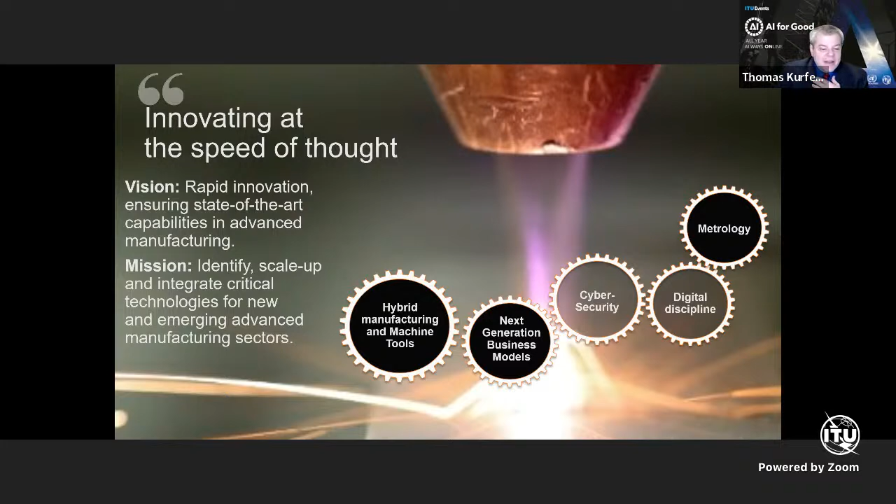From a technical perspective, much of what we think about is building up a product layer by layer—many people think of their MakerBot, a gantry type of system. But the reality is, it doesn't necessarily mean we have to build up in just one direction. Here you can see one of our 5-axis machines, actually a simulation of a 5-axis machine, where we're using a rotary axis to change the orientation of the build.

Think about the propeller, or this paddle we have down here—you don't need any support structures to make it. You can see that as we make it, we just move along and rotate to make sure we're balancing against gravity. Now, as you build this, there are some things you need to think about.

I'll start off with real intelligence as opposed to artificial intelligence. We ran some experiments initially and learned pretty quickly that there were difficulties in printing these corners—it shouldn't be much of a surprise that there's less material on the inside curve than on the outside curve. So when you print this—and this is just a blow-up of the inside area—you have to print fewer passes. You can't go all the way to the inside, so you need to put less material there.

So here are things where we can start to train artificial intelligence to think along these lines. And frankly, part of that training also comes from what we're training our real intelligence, our real engineers, to think about—how do we think about these types of problems, and how do we get artificial intelligence thinking about these problems to help us move things along?

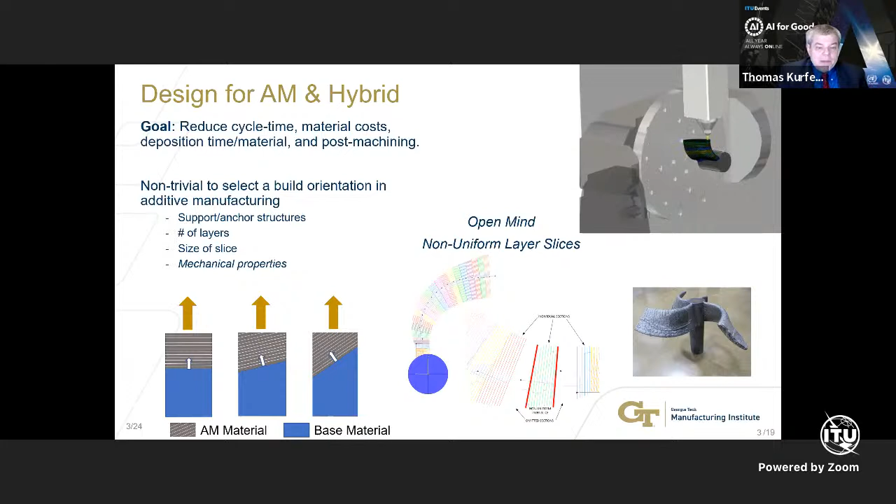One thing you'll hear a lot from me is what I'll call AI, but I call it augmented intelligence—how do we use artificial intelligence to augment the human? I want to make it very clear: I'm not interested in replacing the human. I want to augment the human and move them along. From a societal perspective, this is really the direction we want to go. I'll talk a bit about why it's not just taking the data and sticking it into a black box model and putting it out. So that's one example.

I will show you another example. In this particular case, we're doing what we call 3D turning—actually using the rotary axis and putting the material down. I should tell you, this is not the actual speed; I thought we did have a speed-up here.

This is probably about 10 or 20 times the speed, so this is not the actual speed of the processing. It doesn't quite go this fast, but you can see the liquid material going down, and we're making this bell-shaped object, using both the fourth and the fifth axes.

Again, this is just another way of thinking - not your Cartesian printing, but a cylindrical type of printing. Here we're looking at a conical shape, and if you recognize this, this is a probe from Renishaw. So we're simply using a machine, or a technique that's been out there for decades.

What you see on this probe is that it is cooling. And when my engineers brought this to me, I looked at this and I said, okay, how long does it take until you can touch this part by hand? And they said in about 10 minutes it's cooled down enough that you can touch it by hand. I thought, well, that's great.

If you look at this, an engineer or scientist will see a first order response, which is exactly what you would expect from a block of steel cooling down. So I looked at it and said, first order response with a time constant, or settling time, of about 10 minutes, 600 seconds. I'm pretty happy with this.

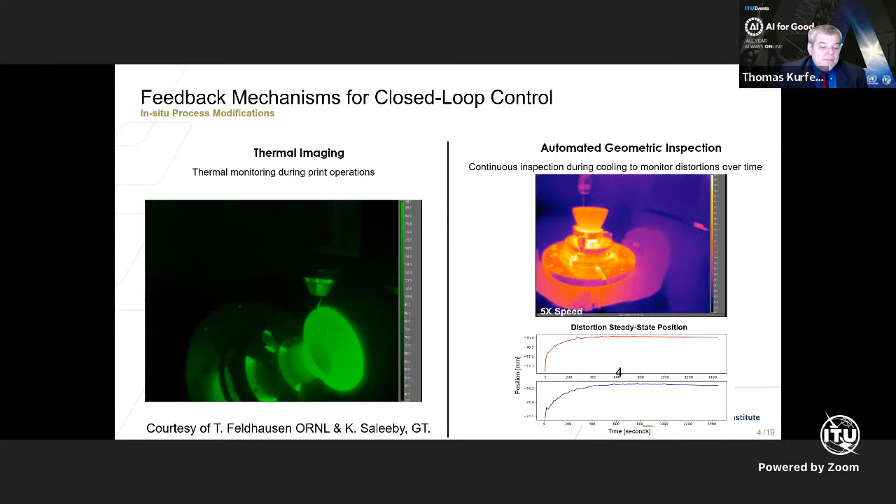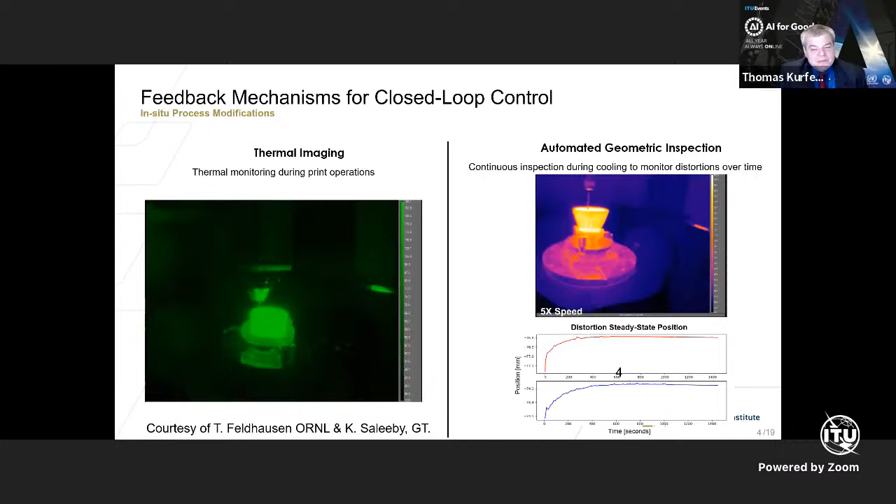Now, if we take a look at this - all right, this is great, but we do have a few other problems, and I'm going to show you where we've got artificial intelligence, and then some real intelligence, which I'm pretty excited about. In this particular case, we're just building up a wall - it's a surrogate model, let's say, of a turbine blade.

Here we're printing as fast as we can, and here we're actually printing. We only print when the temperature of this part drops below a certain level, because if you print too fast, it gets very warm and tends to fall over and not be very good. So here you can see the dwell time actually increases as you're printing this part on the left.

So here we've started printing it, and you can see it slows down as we go. We're using a thermal imaging camera, which is not particularly expensive, tying into the machine. So the idea is we can actually go back and use legacy equipment if we know how to use it. This is some pretty simple AI - just slow down if you're getting too warm.

Now, one of the things you turn around from a cost-effective perspective is you say, well, the problem here is I don't want to slow my machine down. It's an expensive machine - maybe $500,000, maybe $750,000, some of them can be upwards of $1 million. So I really want to go as fast as possible.

But if I go as fast as I can, I don't really produce a good quality part. So one of my engineers, Dr. Saleeby, basically said, well, if this part gets too hot, let's go print this other part. So we're bouncing back and forth between two different parts, not unlike how you might do with 3D printing and packing as many parts as you can in your build space.

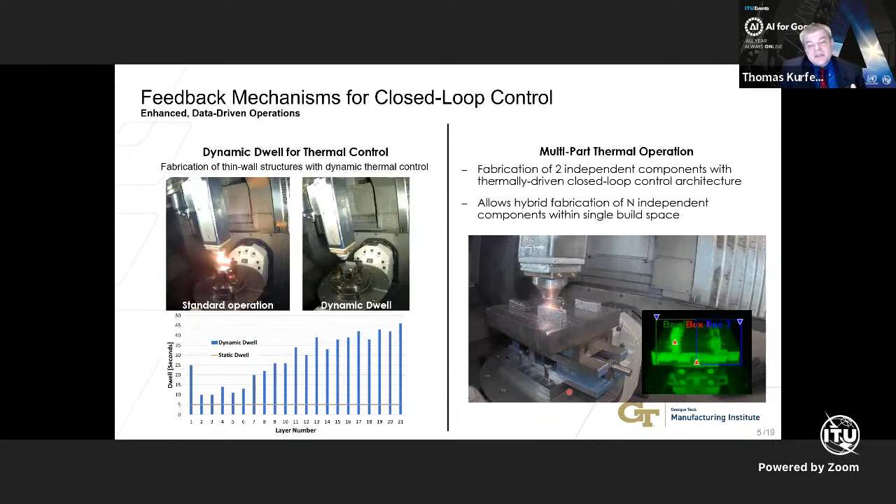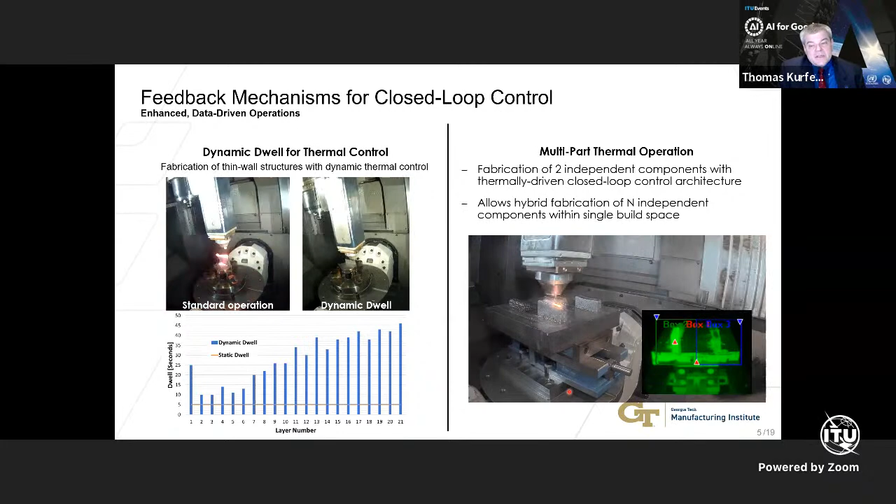But I will also tell you it is a two-way street. We can also take what the artificial intelligence is using and go back to the human operator and augment that operator to make them more cost-effective, more effective, in terms of production operations.

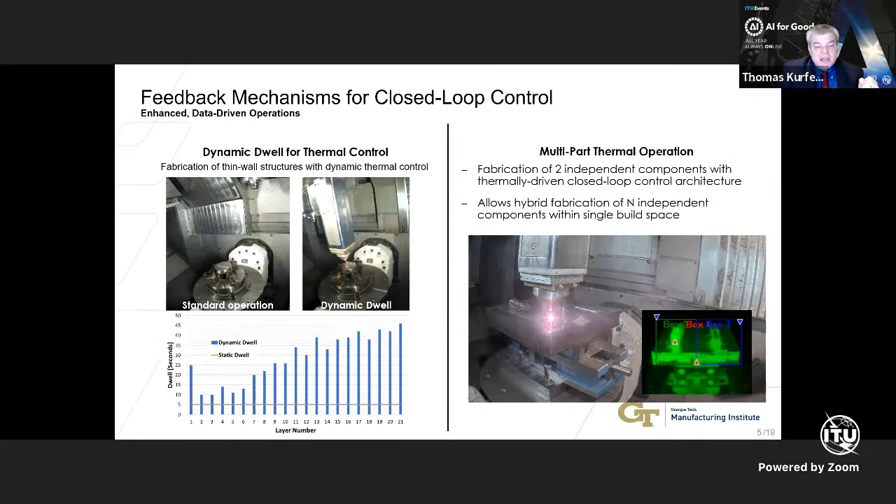So let me talk a little bit about some pretty cool work that's going on at some of our colleagues over at Oak Ridge National Laboratory. This is some work done by Vincent Paquit and a number of his colleagues over there, really going to the level where you can start to control the microstructure of a part.

So what I'm showing here from my colleague, Dr. Paquit, is he's printed out a bunch of different structures in the powder bed system. Basically, you spread some powder out, melt it, let it solidify, then spread more powder out, and keep building this powder bed up. So you build tensile bars at the lower level, and the same tensile bars at the upper level. If you take a look at their microstructure, how the metal forms as it cools, they're very different between the two, even though all the settings are the same.

So you say, why is this? There are a variety of reasons, but it really has to do with it being a different situation when I'm toward the bottom of the bed versus toward the top. You can use AI to tune your machine so that you change your settings ever so slightly, not a very big set of changes, to produce the same microstructure. That's what we're showing here - we've actually produced the same microstructure from the bottom versus the top.

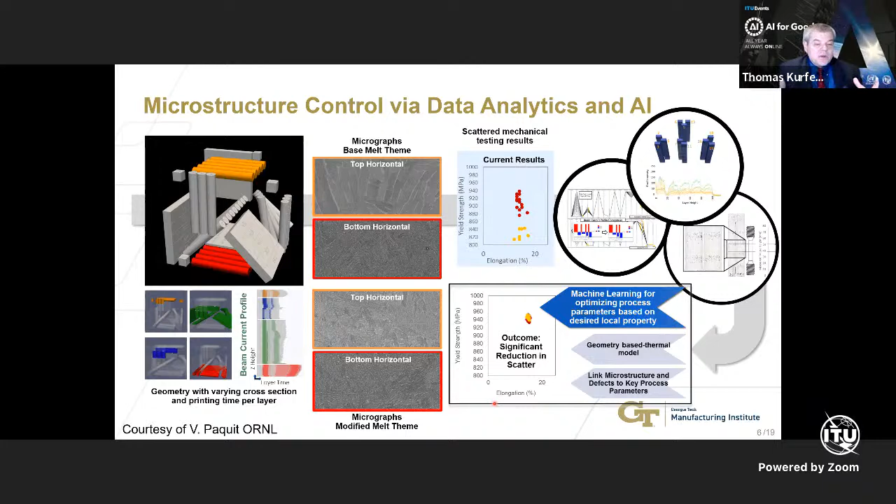I'll just say this up front: a human is good at optimizing maybe 3, 4, or 5 or 6 things if you're really an expert, but AI can help that human optimize perhaps 20 things at a time if they guide each other and work together. So again, augmented intelligence. Just to give you a feel of some of the things we look at and how this works so well.

So now what can happen is the human can work with the AI to see exactly what's going on in the part.

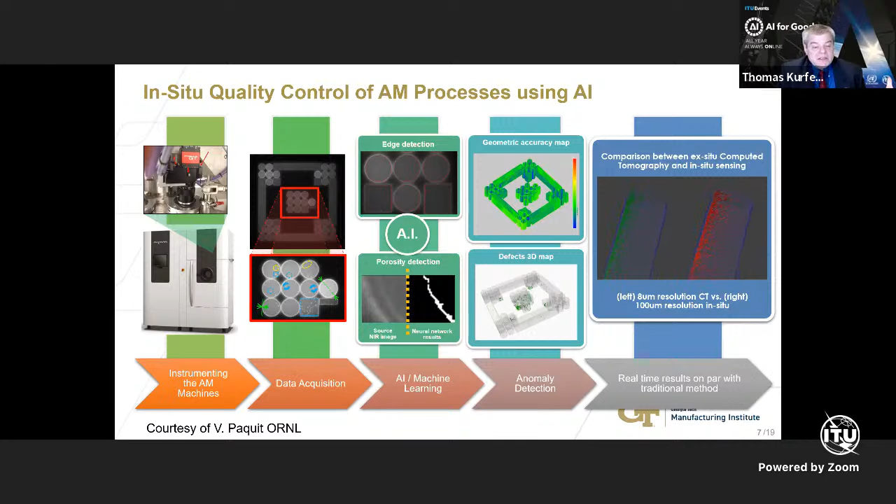Down the road, AI can look at all of these types of images and update the process in real time to move things forward. AI loves images, and so one of the things we might look at is: what about the people operating the machines? There are lots of interesting things you could do there.

I want to point out right away that there are lots of concerns about privacy, so in using this type of information we have to be very careful to enforce privacy regulations and rules. On the other hand, it's also important to make sure somebody doesn't accidentally walk up to the machine and start it inadvertently by hitting the wrong button. So on one hand you want to protect privacy, and on the other hand you want to protect the people around the machine. This can be done, but it's something we really need to think about.

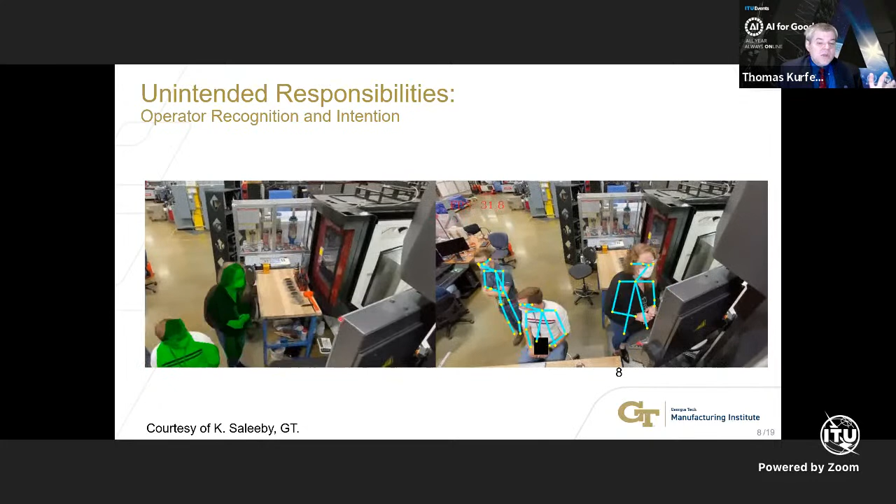We can go even further and actually see where people are looking, and where their hands are. Are they about to hit the start button? Maybe someone is still inside the machine. Are they looking where they should be looking as they're running the machine or hitting the start button?

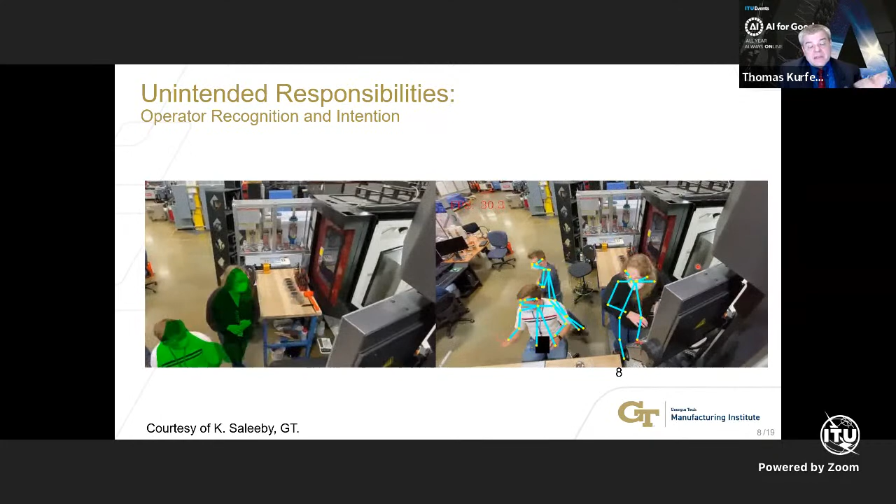Again, privacy is extremely important here. We're just showing that yes, we can do a lot with AI, but we also have to be careful with the data that are generated and how we protect them. In this case it's personal privacy, but in other instances we may look at how to protect proprietary information that gives a manufacturer their competitive advantage.

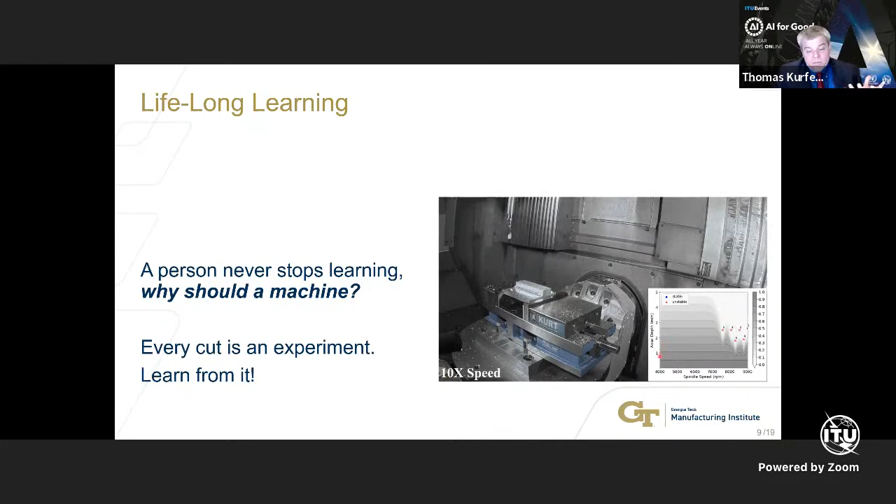The idea is you want to be in the area with the least amount of vibration. You can do this fairly automatically, and while the machine is producing over weeks, months, even years, you can continue listening to it as it may change slightly, and update your model. A key thing here is: a person never stops learning, so why should a machine?

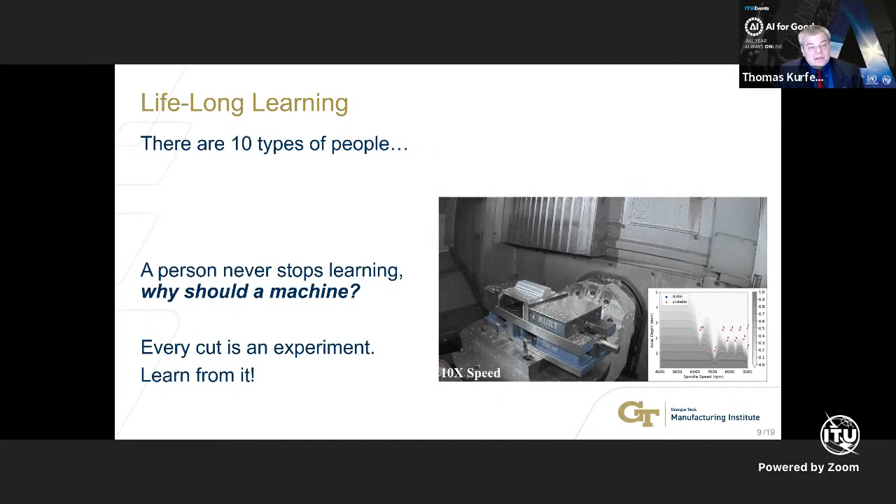I find this sort of interesting: there are really 10 types of people out there. Those 10 types of people are those who understand binary and those who do not understand binary.

If you think about that, of course, all of computer science will laugh at this statement. But the reality is, from a training and educational perspective, we see that computer scientists who have domain expertise, for example in manufacturing, are in much better position for steady and stable jobs than those who are only in pure computer science.

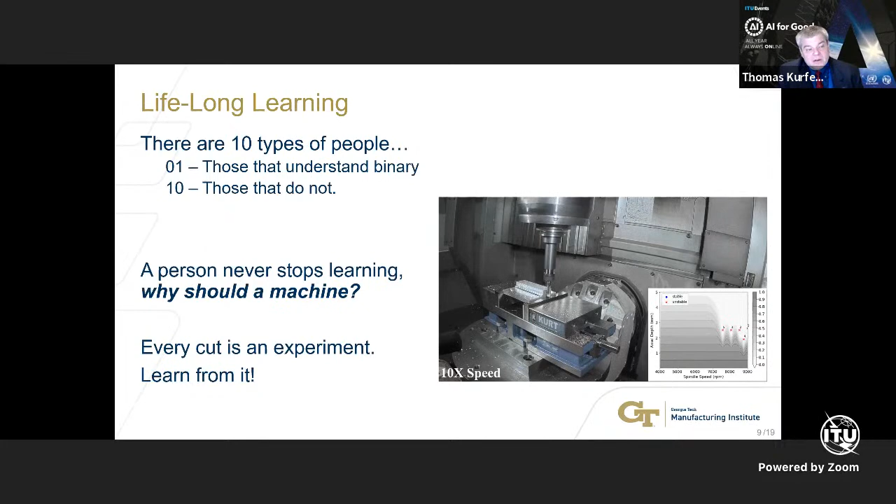So some domain understanding is key. The other side is we also see a lot of engineering types, in particular manufacturing, my experience area, that have much more capability in computer science. And so these tools are available for use, from an educational perspective, making sure people understand how to use AI types of tools.

My colleague Scott Smith over at Oak Ridge, we were PhD students at different institutions, but 35, 40 years ago his statement is: we used to put sensors on all of our machines. We would spend months putting sensors on the machines, run the machine for a week or two, and then spend weeks analyzing the data. Today, all of those sensors are in place on modern machines in production systems.

So every time a cut is made, just like over here, it's like running a PhD experiment from several decades ago. We're continuously learning, and every cut is an experiment. We're learning from it, just like we do in real life.

So in terms of upskilling, it's really rethinking things. You say, well, how do I put additive into a machine tool for hybrid and so forth? It's really thinking outside of the box.

In this particular case, we have a robot that's used to load and unload the machine. Instead of having the loader and unloader on there, we actually have it with a weld head, so it's putting down metal inside of the machine. It turns out we can take some of our older equipment and utilize it in a very new fashion. This is a 1980s CNC machine tool, and we're using it.

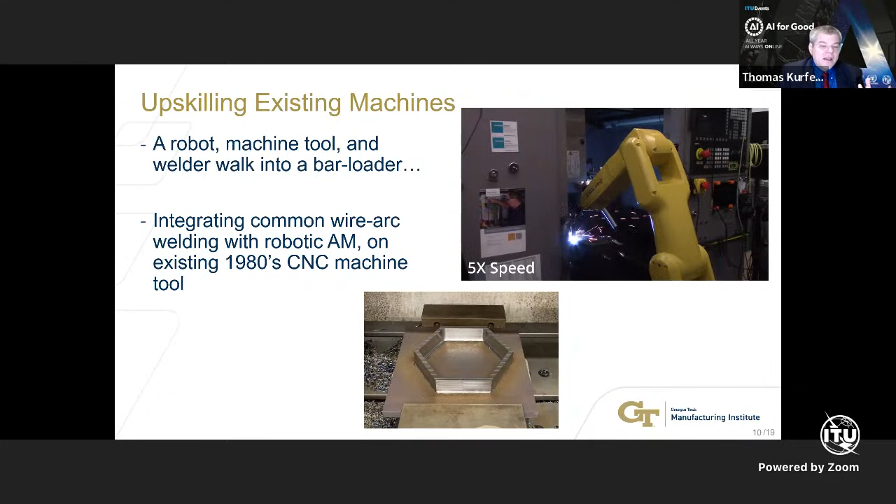So now what I'd like to do is pivot a little bit to AI, and think about how we move forward, and really culturally and mentally how we need to pivot to think about AI and leverage it to improve our current situation globally.

But let me point out something we've probably all seen. I was driving the other day and Google Maps said, get off at this exit. I was thinking, this is not the exit I need; I need to go all the way up to this particular exit. Maybe there was an accident or a traffic problem, so fine, there's real-time sensing that Google Maps has, I will get off. As I got closer, I looked at what Google Maps said: get off at the exit, cross the road, and then get back on.

So it was getting off for a detour of maybe a few hundred meters. I took a look at that and said, well, maybe there's an accident right there at the exit ramp. As I got close to the exit ramp, I looked up and didn't see any traffic. The traffic was flowing straight through, no blockage. So I decided maybe there was a mistake here, and I should go straight ahead. I didn't get off at the exit and kept going straight ahead, and there was no accident.

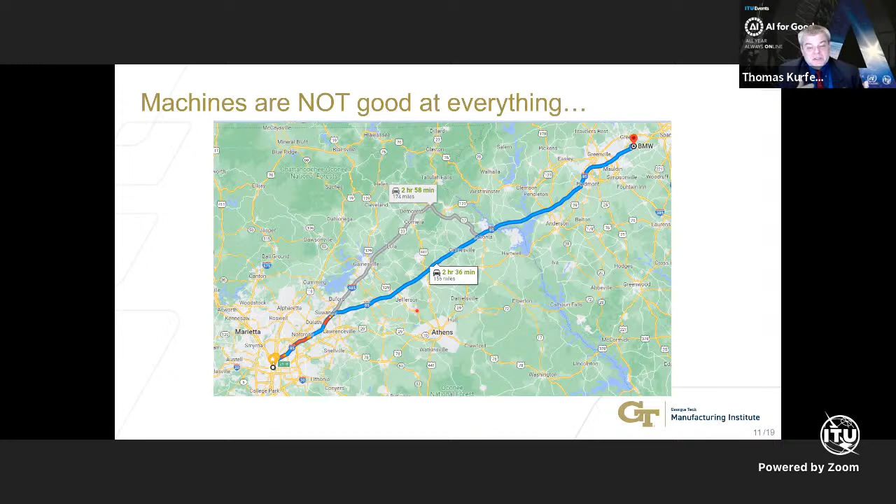So I'm using my own set of sensors, which in this case was just my eyes looking forward and understanding, yes, this is just an error that we sometimes see. I don't know why, but we correct for it. So this is real intelligence working with artificial intelligence to give you the best solution. So these are the types of things really that we look towards and sort of working together.

And so now I will give you an example of how you need to think about some of these problems. So very much in manufacturing, people say, well, I want to use AI to pick out the bad part. Please, let's pick out the bad part and so forth. And the real question is, well, okay, for AI, and I think most people do know this, and if you don't, it's a good point to understand, what is one of the most important things that AI needs? AI needs data. You could say, well, it needs good data, it needs very curated and labeled data and so forth. Yes, but it needs a lot of data.

So the first thing that happens when a company says, hey, can you help us to use AI to pick out a bad part? I ask them, how many bad parts do you make? And their answer is typically, well, 1 part of every 1,000. That's not a very good situation. It might even be 1 part of 10,000, 1 part of 100,000, or perhaps even a part per million. And so if you're making very few bad parts, you don't have a lot of data, so it's very hard to train the network on the bad part.

But what you do make is a good part. And so in this particular case, what you really want to ask is, don't use AI to pick out the bad parts, but tell AI to pick out the good parts. We have a lot of data. We can train it. It can tell you what a good part is. If a part is not good, it doesn't mean that it's bad. It just means that it's not good, perhaps, and that we should take a look at it. So that's where we should focus our real intelligence on. And that's what we're showing over here.

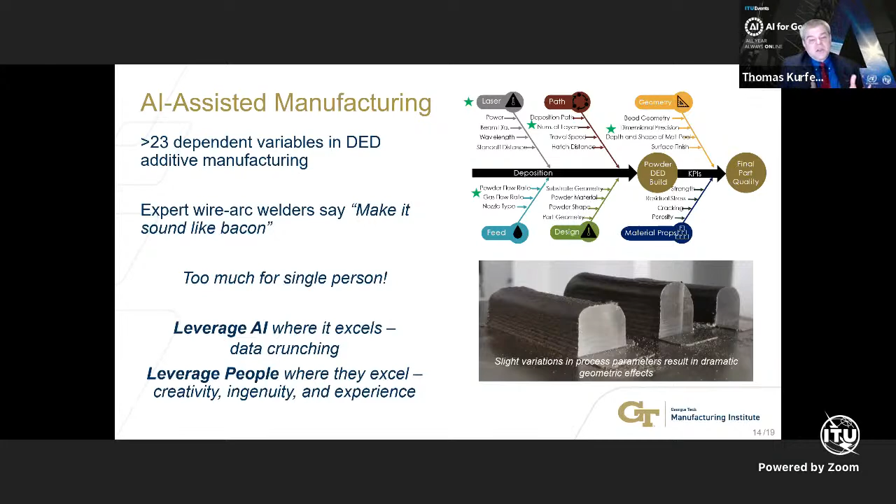So you make a measurement, you say, okay, I've made my measurement, and that measurement is uploaded. So now we have digitized the data. We eliminate somebody punching in a wrong number or recording a wrong number or reading a wrong number. But we have that person maybe make 5 or 6 measurements, and we take a look at their distribution. So the first thing we can do is we can start to take a look at this distribution.

When you're a novice, you have a much wider distribution on your measurements. And then as you go along, you get a tighter distribution. So we can look at the person's learning curve. Again, I want to highlight the fact that we have to protect privacy, but the idea here is not to blame somebody for not doing a good job, but to understand if they're having an issue with it and to help them with their training and also understand the human process.

I don't think it's a big stretch to say, well, gosh, yes, I can have my AI determine the difference between a line and a circle. So, for example, if I have cleaned up this part and we've really gone through it, instead of a bunch of lines, we have circles. If there's a little bit of lines left over here, that means we haven't cleaned up our part particularly well. So the idea, again, is that we can use the AI to augment the human.

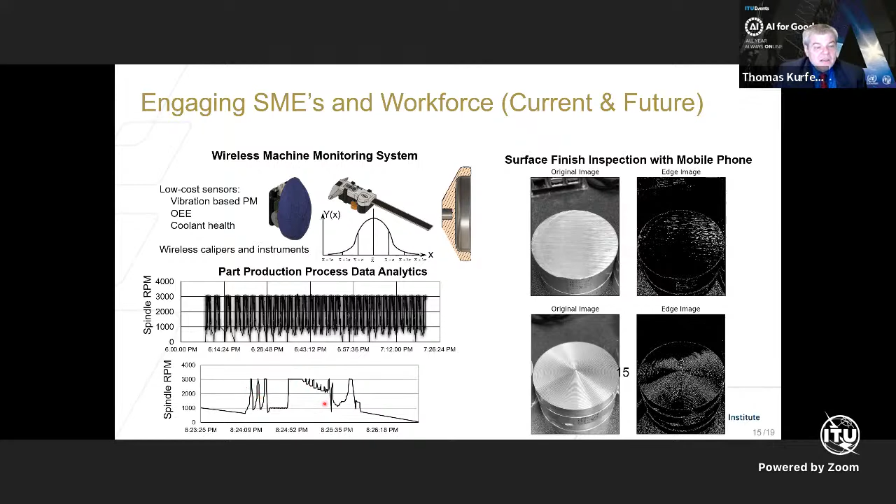So you do have to protect the data from a privacy perspective from both people as well as a process perspective. If this is proprietary information that you don't want to get out, because this information here gives you exactly the geometry of your part. You can back that out.

In terms of generating those data, 17 NOAA satellites are generating weather data, generating terabytes of data, going into 5 different machine learning models on 3 different supercomputers. They actually use multiple Doppler weather radar images and data, and integrate it all together just to get the weather. And so if you think about it, well, how are we going to get the workforce? How are we going to get people to use this? We already are. So you've got to make it move forward and really link it all together.

And how do we do this? If you go through a plant, if you take a look at a CNC machine tool, a robot or a heavy piece of equipment, you see a lot of that capability already there. You see Windows XP, maybe some older material, but you see Windows there. Many of these plants are online, so you see a lot of the infrastructure in place. Again, I think the biggest issue is how do we leverage that infrastructure?

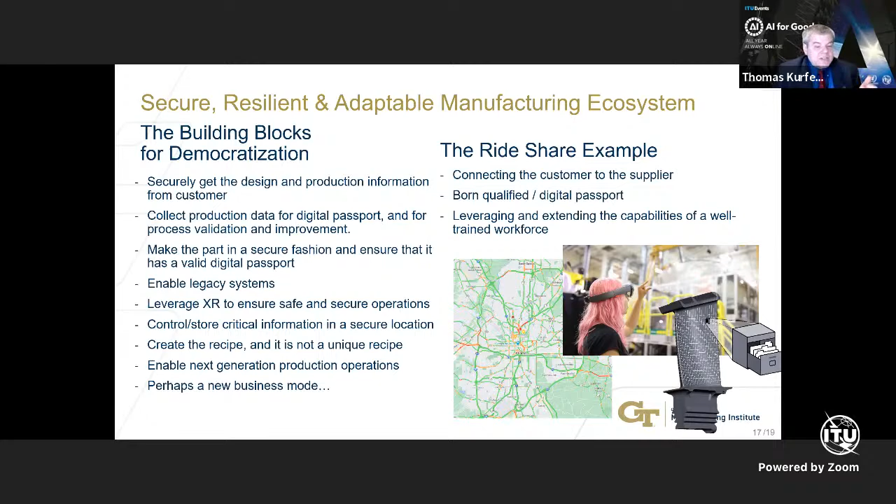And of course, the big question is, okay, so if we do that, when am I going to lose my job? That is sort of a big question. I have to say, this was probably 15 years ago now, maybe even a little longer. I was testifying in front of Congress, and we were talking about automation.

I was asked, when will I have the robot that will load and unload the dishwasher? There were, I think, 3 or 4 of us testifying that day, and the person next to me was an academic in computer science. He said, well, that's going to be in about 10 years or so, we should have that. But I think the reality, and again, this is where you need to have some domain expertise, is that person really hadn't spent a lot of time with robots and making use of them.

You have a dishwasher, this is hundreds of dollars. You have a robot, this is thousands, tens of thousands of dollars. If you've ever tried to get a robot to even put a peg in a hole, it's a very difficult task. You need to do a lot of work to get it to behave as good as a human. Now you want it to stack your dishwasher, which is very difficult for a robot.

The next thing is, if you've ever used a robot, they're for industrial purposes and so forth. To have them handle your dishes, your fine china, I wouldn't want to do that because I think there would be a lot of broken dishes and glasses. So again, the human is great. Loading and unloading is great, but you've got to put the dishes away in all the cabinets up here. So is the robot going to be able to do that?

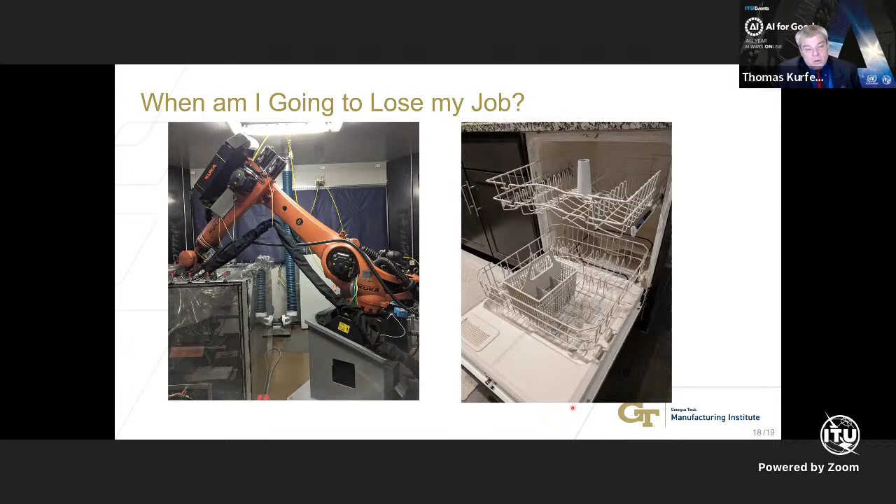But the idea really is we have simulation. We could do a lot of things offline, but ultimately you've got to go off and build this thing and make it move forward. The idea really is, in terms of the big picture, it gets back to this whole democratization. So let me build up to my last point.

The digital thread is a two-way street. We've got a lot of information coming out, and we can get data for machine learning and AI. That's very important, but we can also use it to help augment and train the workforce.

And we really see some interesting things in terms of virtual reality, augmented reality, any of the extended reality. So it's not going to take away jobs, it's going to make the workforce more value-added.

It allows us to deploy rapidly, faster than the competition, to really deploy at the speed of thought. I have a really good idea - how do we get that capability, that process capability, that new design, that new product out there?

So we can learn from previous deployments, from previous production operations, even from previous people. We've got experts out there and people are very concerned - my expert is going to retire, what am I going to do?

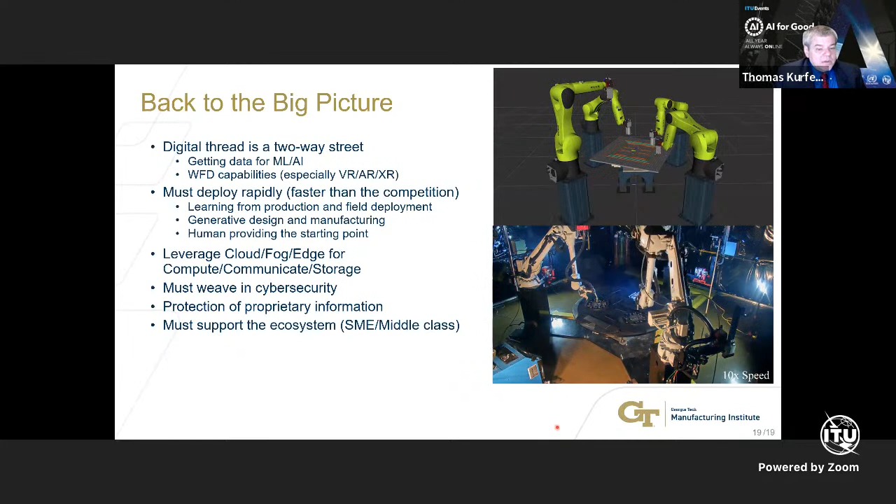So I will wrap up here, and then we can go to some Q&A, with a final thought. And this is really in terms of where do we need to go with people. I will say this, and I think that we are moving in this direction. But what I'd like to do is highlight a statement from a 20th century philosopher. It really is about how we're going to integrate that workforce together, how we're going to really change how we think about AI and working together and so forth.

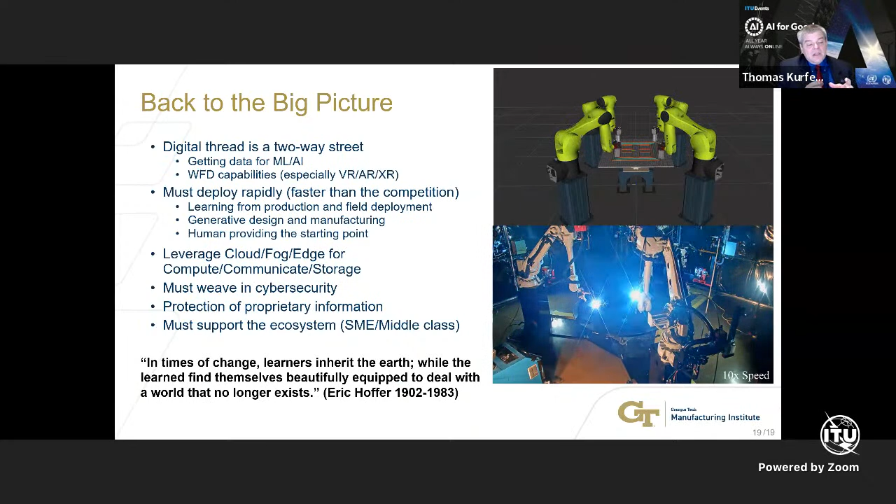This is from Eric Hoffer in the 20th century. He said, in times of change, learners inherit the earth, while the learned find themselves beautifully equipped to deal with a world that no longer exists. So the bottom line is, yes, technology is changing and moving along, and we've got to keep up with it. Eric Hoffer was correct in the 20th century. I think that rate of change has accelerated, and I think that this is even more pertinent today as we approach the middle of the 21st century.

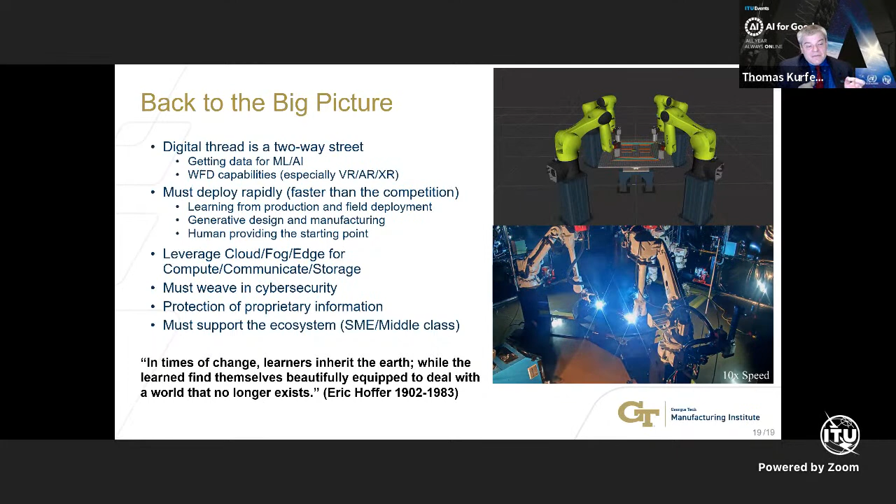And so with that, I really want to say the investment needs to be in people to leverage that AI and to move things forward. So with that, I will thank you and be happy to answer any questions that you might have.